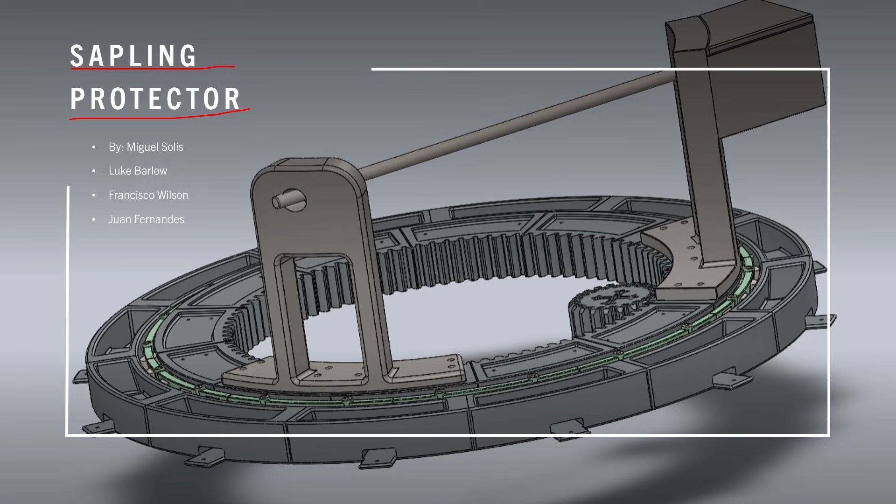This is Group 17, The Sapling Protector, by Miguel Solis, Luke Barlow, Francisco Wilson, and Juan Fernandes.

The motivation behind this project is to take care of young plants that often aren't looked after too much. I gave my mom 3 blueberry bushes, and they all died within 3 weeks. And a similar story when I gave her a mini guava plant.

Plants require a lot of care, and sometimes the people who are supposed to be taking care of the plants do not give that care. So in order to mitigate the loss of life of the plant, and to ensure that more saplings make it out of their baby stage, we wanted to create a device that protects them from the sun, because not all plants want to receive the same amount of sunlight.

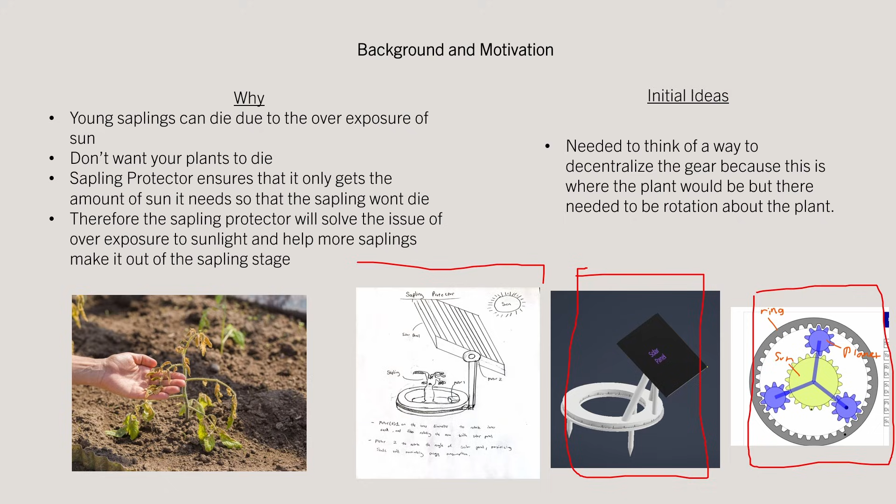Our initial ideas were a planetary gear system and a thrust ball bearing. This is the original sketch, and though it's not listed here, the design we eventually ended up going with was the tapered roller bearing design.

The plan was to attach arms with a solar panel to the moving inner cone or internal gear. This solar panel would rotate around according to the position of the sun.

Bearing design material covered in class was in the context of millions of revolutions. So what we learned in this class did not apply necessarily to our type of bearing, because it is going to do one revolution in one day. So it is not the context in which we learned bearing design.

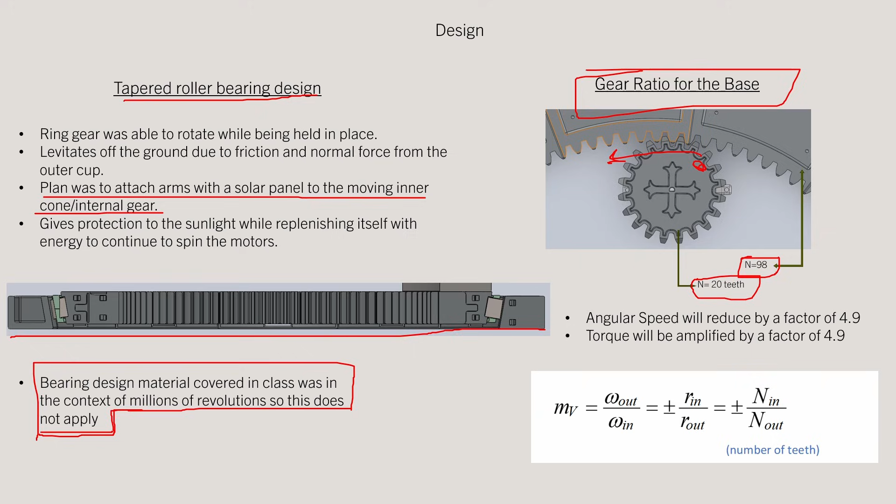Instead, we went for gear ratios. This is the gear ratio for the base. This is the motor that's going to turn the inner gear, the internal gear. We have 98 teeth on the internal gear/inner cone, and 20 teeth on the pinion. This leads to a ratio of 4.9, which means angular speed will reduce by a factor of this much, and torque will be amplified by a factor of 4.9.

Next, what we did was key design. We chose a diameter of 0.75 inches, or 3/4 inches. We converted to millimeters and then chose the corresponding key width and height. Since we were between 17 and 22 millimeters, we had a key width and height of 6 by 6 millimeters. This was engraved into our pinions for the gearbox.

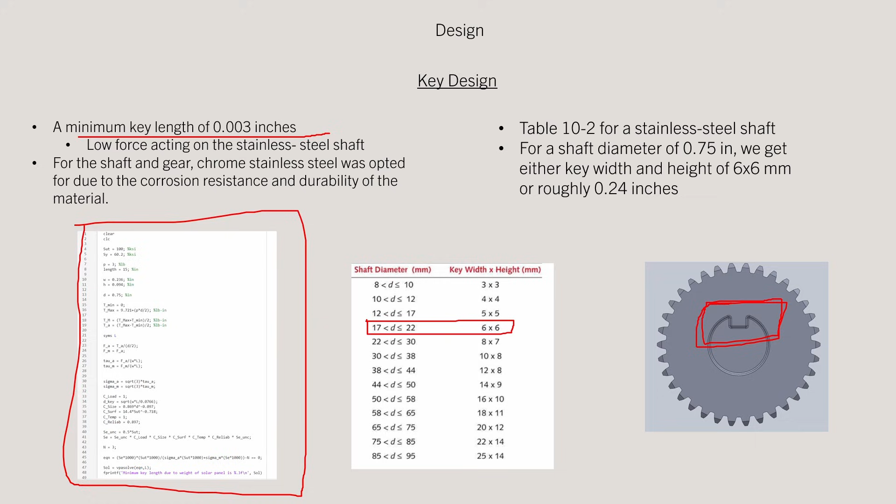This is our code to calculate key length, because we have the width and the height, but now we need the key length. Applying our load to a stainless steel shaft gave a minimum key length of 0.003 inches, which is really short, but understandable since our load is so small compared to the stainless steel shaft. It's around 3 pounds for the solar panel, so a stainless steel shaft can handle that forever. We chose the stainless steel shaft because of its corrosion resistance and durability.

The next design was a compliant mechanism, which was researched on the surface level to make a one-way snap fit mechanism. Can be seen here with the dimensions and the fittings in the assembly. We used it for the inner cone, the outer cup, and the cage, the roller cage.

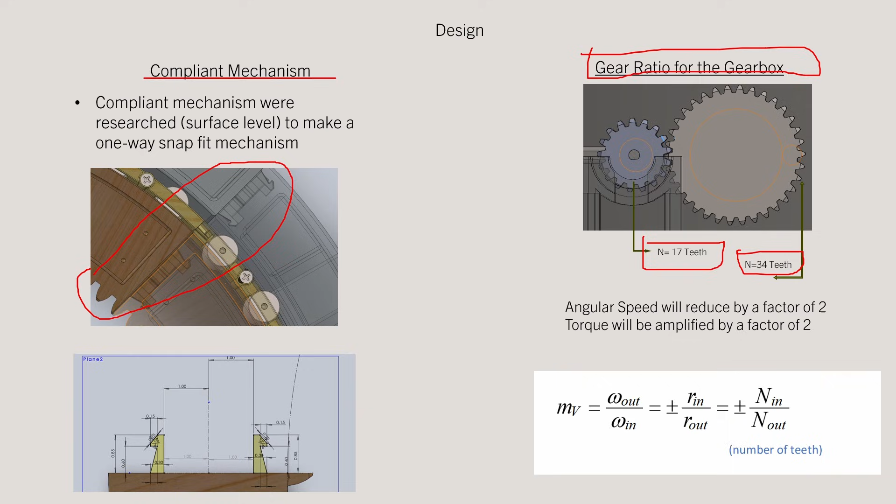For the gear ratio of the box, as mentioned earlier, we had 17 teeth for the pinion and 34 teeth for the main gear that's going to be attached to the shaft, the one that had a key design in it. This reduces the angular speed by a factor of 2, and increases torque by a factor of 2.

For the FEA analysis, we had a simple beam with two fixed supports on both sides. The reason it was like this was because most of the time our machine is going to be stationary. It's not going to be moving, or it's going to be moving very slowly according to the position of the sun.

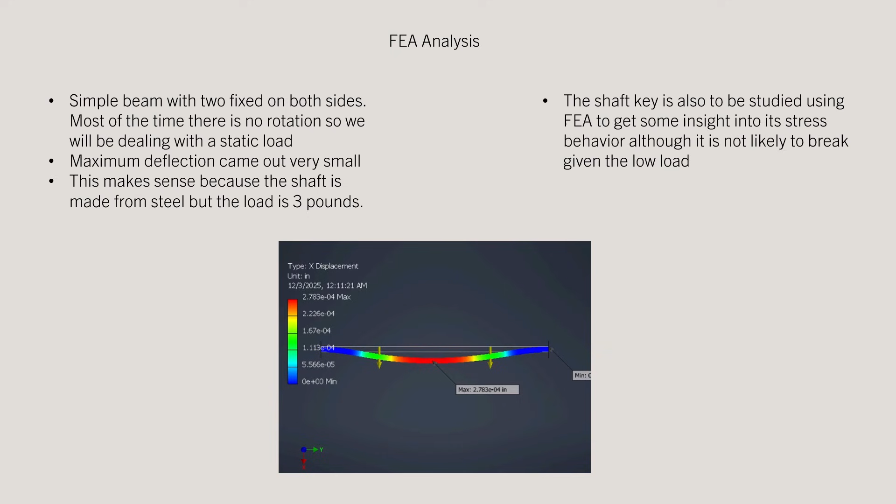Most of the time we have a static load, and since our load is so small, this gave us a very small maximum deflection.

For the sustainability analysis, we first converted everything to wood just to see where we would go. Our carbon, energy, air, and water footprint decreased by 98%, but our costs went up by 1,500%. This is possibly due to the complex geometry, and since wood isn't typically used for machines, I imagine there's some type of cost associated with making those complex parts.

So we made a compromise. We chose a ceramic base, which is still eco-friendly and environmentally friendly, and it has great weather resistance and hardness.

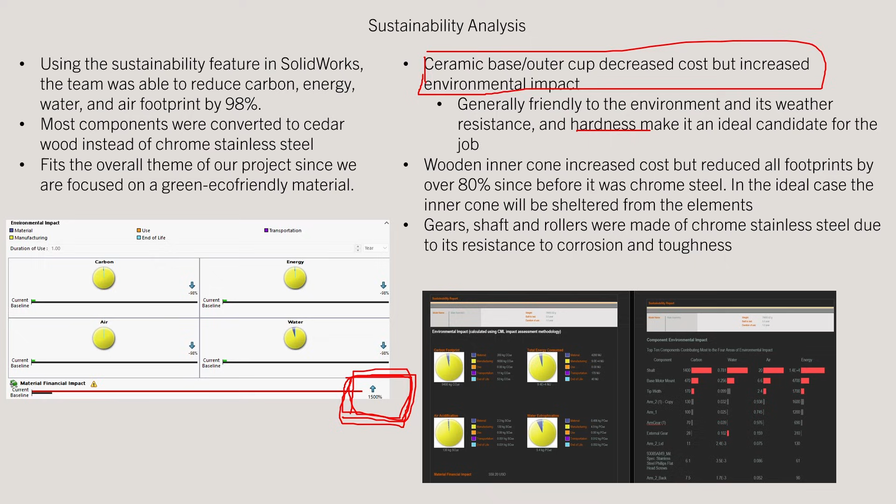This makes it an ideal candidate for the job. The wooden inner cone increased costs but reduced all footprints by over 80%. It was the main cause of our footprint decreasing. The gears, shaft, and rollers were made of chrome stainless steel due to its resistance to corrosion and toughness, since they are always in contact, always moving, and under the most load, so these were kept as chrome stainless steel.

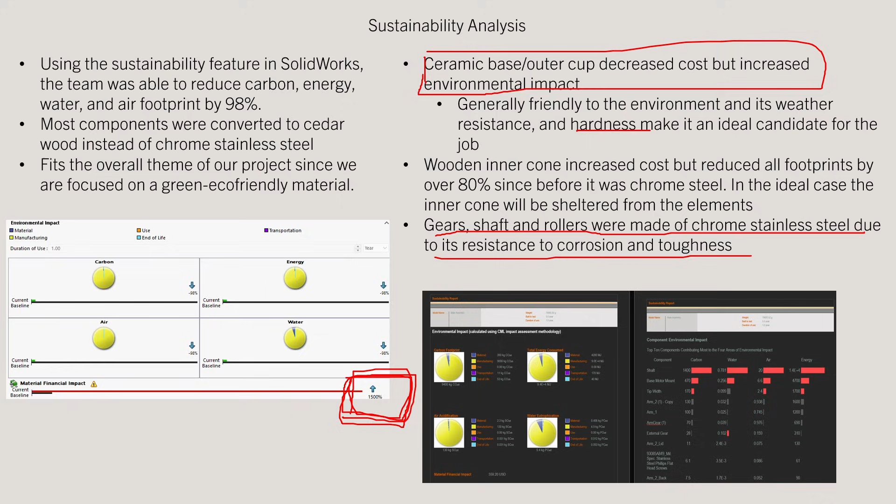Now looking at cost analysis, on the left here we have the section for the non-ideal project, which was constructed from PLA entirely. Although it was constructed from PLA entirely, it only made up 54% of the cost. The total cost for PLA involved in the project was around $266, and the total cost for the entire project was $501.

This is because the rest of the money was taken up by the other items involved, mainly electronics such as batteries, motor drivers, wires, Arduinos, etc. If this was to become a viable product, we would have to sell it around an $800 price tag to ensure we make some sort of profit. This is further discussed in the next slide.

On the right-hand side, majority of this report is irrelevant to the cost analysis and has to do mostly with sustainability, but what I want to focus on is down here.

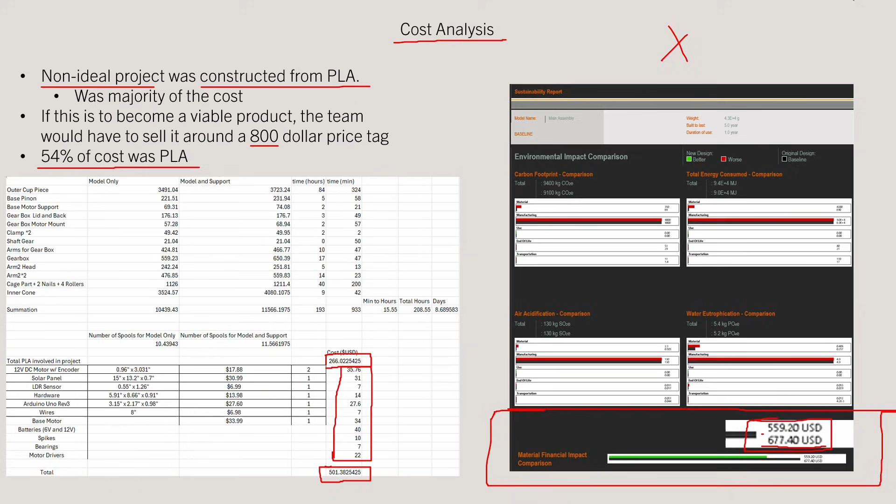Here I enlarged this photo to show the difference in price: $677 is for all cedar material, and $559 is when we diversify into aluminum, cedar, and stainless steel. Looking at the cost analysis, for the PLA version our sale price is around $800.

Cost of materials is around $600 from experience, assuming our sales increase by a factor of 1.5 times each year. This gives us a net present value of around $22,000, which is greater than zero, meaning it's viable.

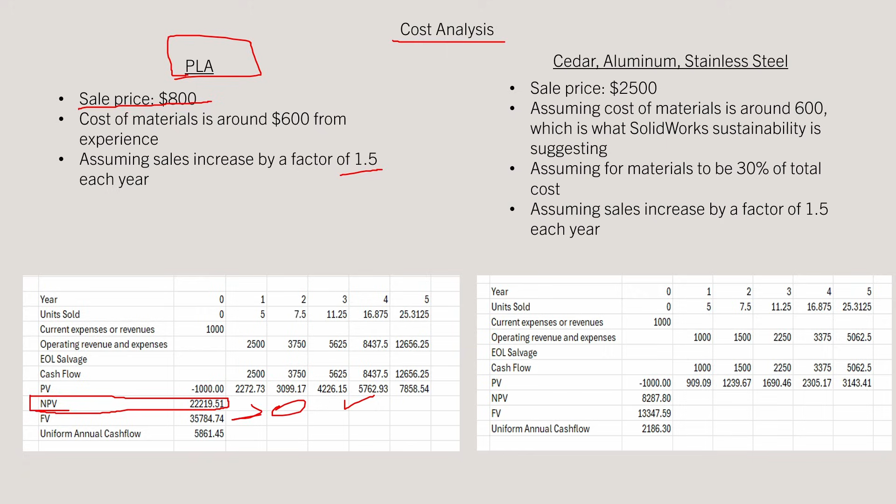Now if we look at the realistic ideal approach using cedar, aluminum, and stainless steel, the sale price has to be around $2,500, assuming cost of materials is around $600, which we previously saw in the SolidWorks sustainability feature. This also assumes materials are 30% of total cost, a conservative estimate, and that sales increase by a factor of 1.5 each year.

Here we see we actually get a lower net present value than when using PLA.

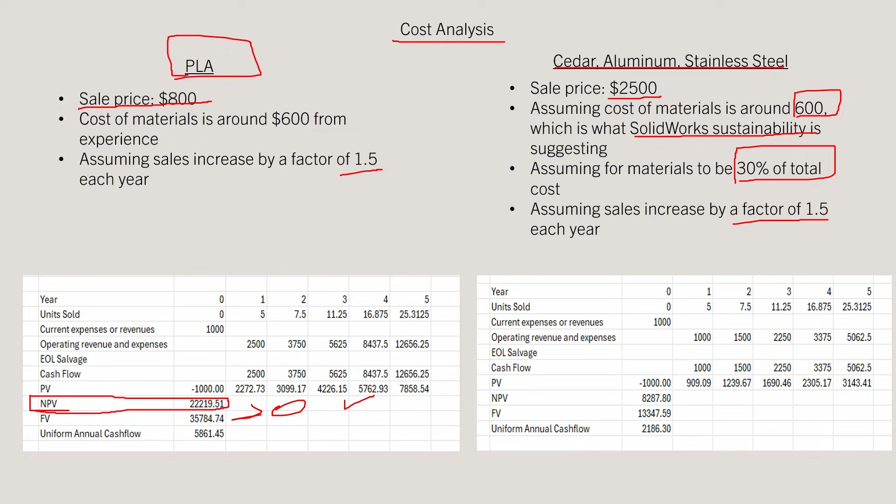For future improvements, we can do several different things. We can make a cover to shield the rollers, pinions, and inner cone from natural elements, ensuring our product lasts at least 5 years, which is the goal.

Another thing we can do is build fins, seen on the right here, an example of a heatsink. Similarly, we can build fins on the parts containing motors and batteries, which prevents overheating and breakdown of the electrical system.

Another thing we can do is make the arms 2 feet instead of 1 foot, as originally planned. This also allows for a larger area covered by the solar panel.

You can also create a circular ring base that goes underneath the outer cup. That way it also acts as a case for the inner cone as it sits under it, protecting it from being rubbed by grass or uneven terrain. This ensures uneven terrain never affects the product, so the inner cone can run smoothly.

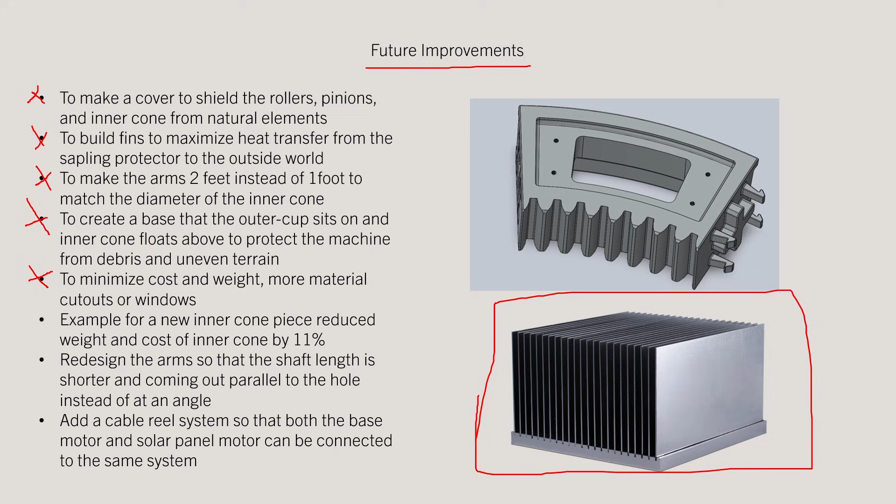Another future improvement is to minimize cost and weight by doing more material cutouts or windows, seen here on the right. When putting this into the slicer software from Bambu Lab, we were able to reduce weight and cost of the inner cone by 11%. We can also redesign the arms so the shaft length is shorter and comes out parallel to the hole instead of at an angle, and even add a cable reel system so the entire machine runs under one Arduino or microcontroller and one battery.

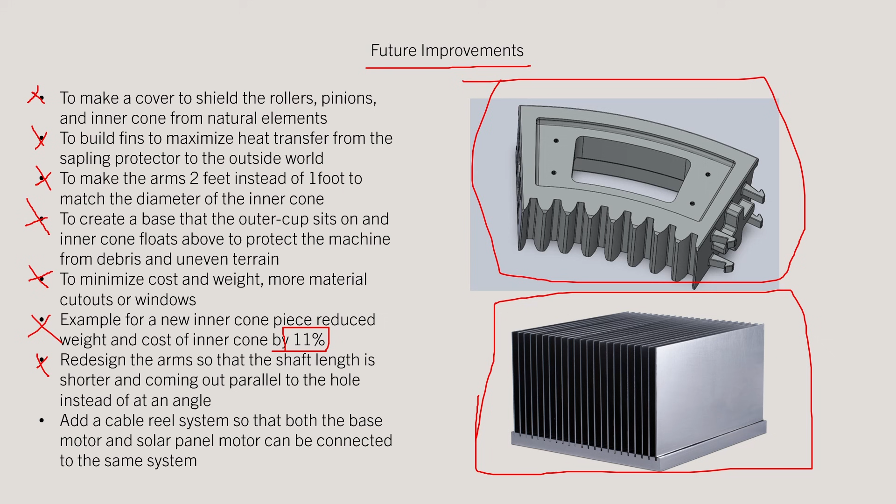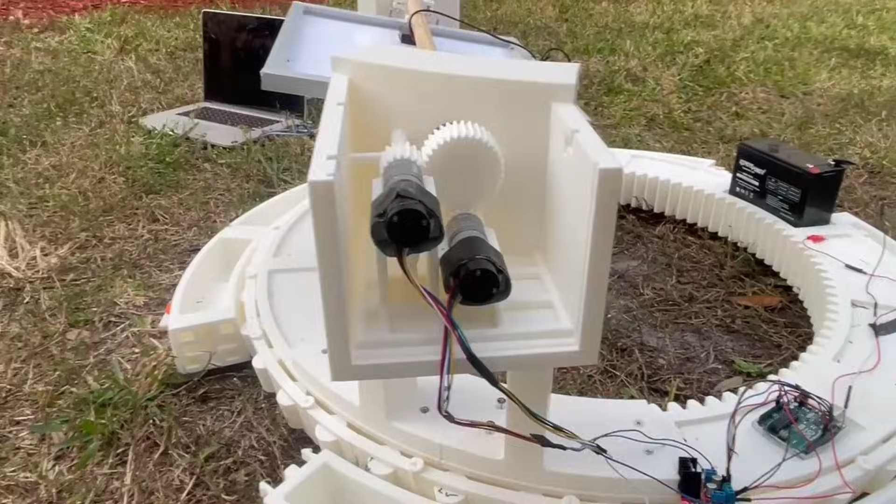Here is the base motor, which, as you can tell, has a little bit of a problem — it doesn't go deep enough, so it's not fully meshed how it should be. To solve this, we can either dig a hole or decrease the height of this base motor, since it's a tapered roller bearing — as we go down further, the diameter shrinks.

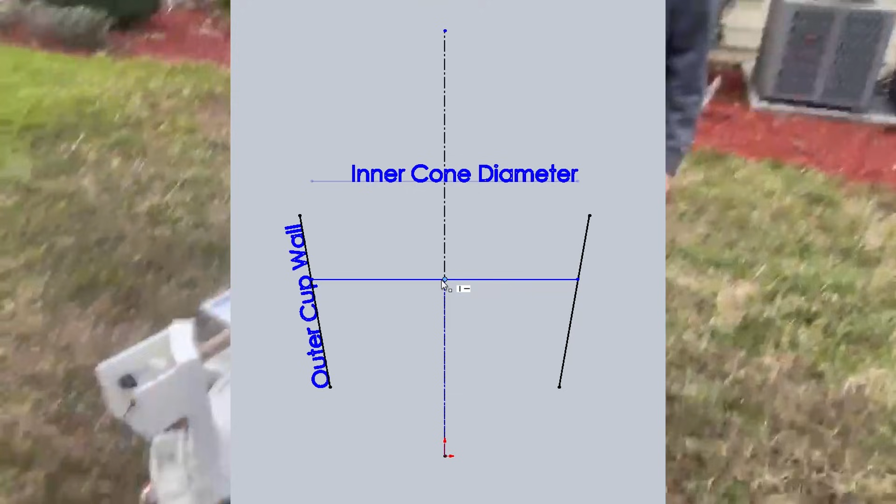So if we fix the diameter for the inner cone or internal gear, and also fix the diameter of the outer cup, eventually it won't be able to go down any further. The problem we encountered is that there's not enough space between the inner cone/internal gear and the ground.

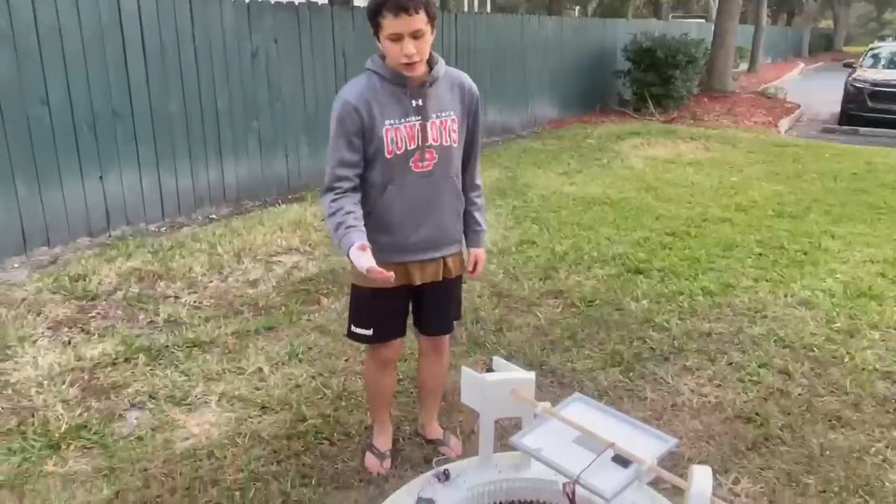This is due to the rough terrain. As we can see here, we have a nice space between them, but as we move along the terrain, it gets tighter and tighter. This isn't due to the unevenness of the inner cone, but rather the unevenness of the terrain itself. So to compensate for this, a future consideration would be to introduce a base below everything, sort of a ring, that flattens everything out, so it's always flat and there's no interference from grass or other debris.

At this position, the plant would ideally first have a bigger solar panel to cover it when the sun is right above. This is the position it would be at, and then it would rotate like this to cover the plant accordingly, rotating the base as well.

So okay, let's get this thing started. First I'll start off the solar panel. I'll preface this by saying we don't have everything autonomously controlled as ideally it would be — it would ideally take in sunlight from the sun and move and position itself accordingly. Right now we just have a proof of concept that it moves and that the gears work. So mind you, this is not how it's going to be ideally.

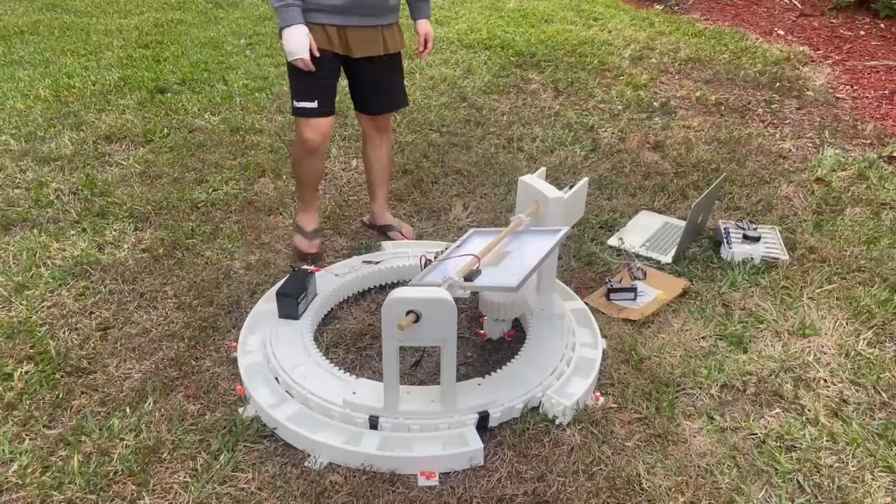The same thing goes for the base motor — we have it at a constant speed, whereas ideally it would move according to the position of the sun. So here goes the solar panel first.

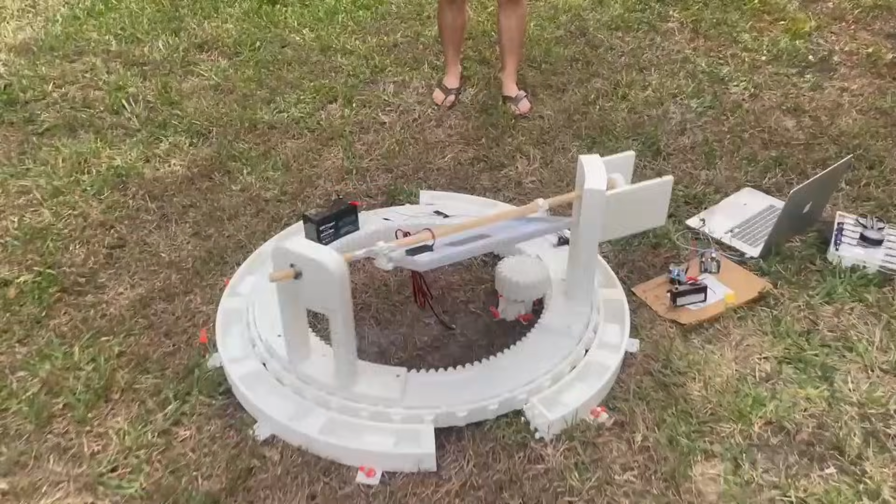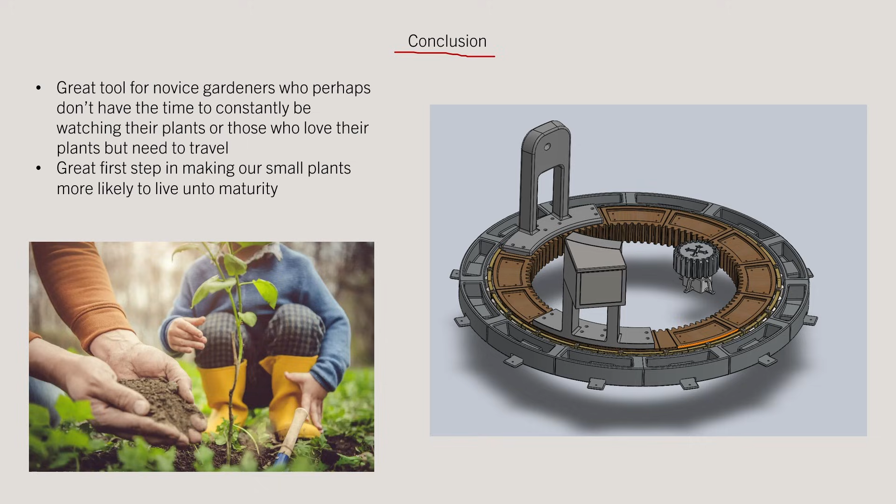In conclusion, the sapling protector is a great tool for those trying to take care of little plants and grow them themselves, but who perhaps don't have the time to take care of them or are constantly away from home. The sapling protector is an eco-friendly device and machine that helps life grow more abundantly and helps people take their gardening to the next level. Thank you for watching.